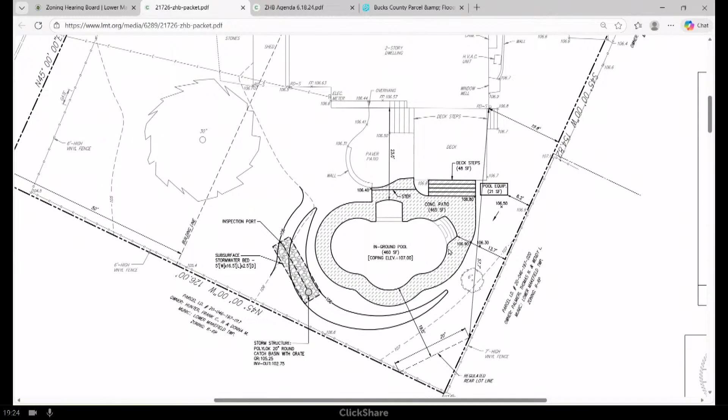Dan, did you take a look at the specs for the mitigation? Yes, that's correct, everything Mr. Lisanti said is accurate in terms of the percentages and the size of the subsurface stormwater bed. So it takes it back to an effective of 13%? Correct. Okay.

Any additional questions from the board? Is there any public comment in the room? Is there any public comment online? No one online. Thank you.

Would someone like to make a motion? So I will move to approve Appeal Z 25-47 as presented with the effective rate bringing the impervious surface down to 13%, subject to township approval.

Is there a second? Second. Discussion? All those in favor? Aye. Aye.

Congratulations. Good luck with your project. Thank you. Thank you very much.

At this time, Appeal Z-26-1, 490 Liberty Drive, please come forward. Or are they online? Online. Oh, there we go.

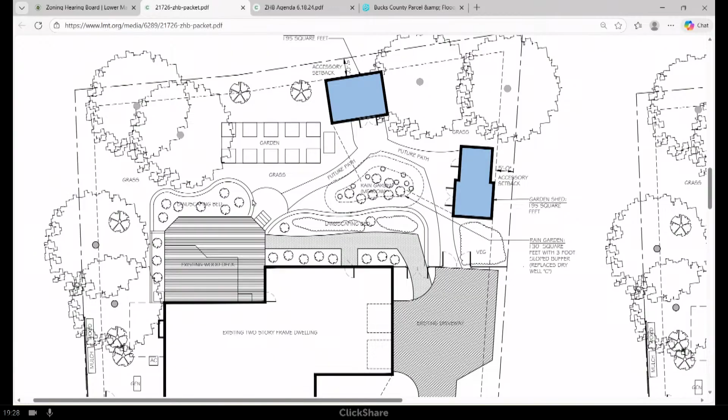Okay, I'm looking at these plans, and when I was home preparing, what am I missing? They appear to be the same.

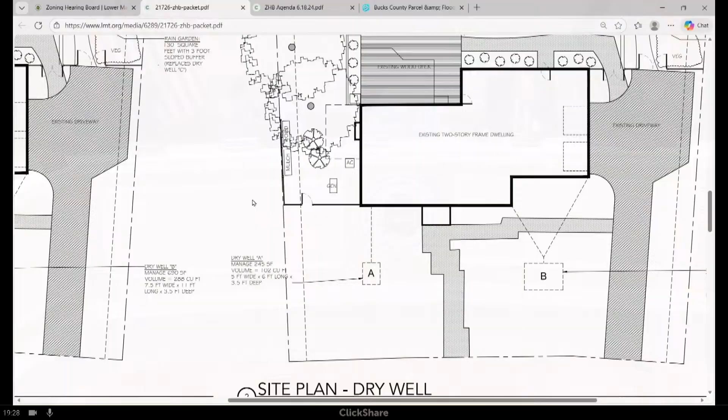So the one on the left has the option for the rain garden for stormwater, and I believe the one on the right is for 3 dry wells. Is that correct? So the one on the left, you're correct, has 2 dry wells and a rain garden, and the other has 3 dry wells, essentially.

Thank you. All right, yeah, board. I just don't believe the client has decided which direction she wants to head, but again, both should be sufficient.

So were any specs provided for the dry wells so our engineer could review? Yeah, so there were. If the board were inclined to approve it, I would just say subject to approval by the township engineer, because honestly, the combination of the dry well and the rain garden, I wasn't really sure how to calculate it. Okay, but either way, Jim or Kyle can look at it if you were to approve it.

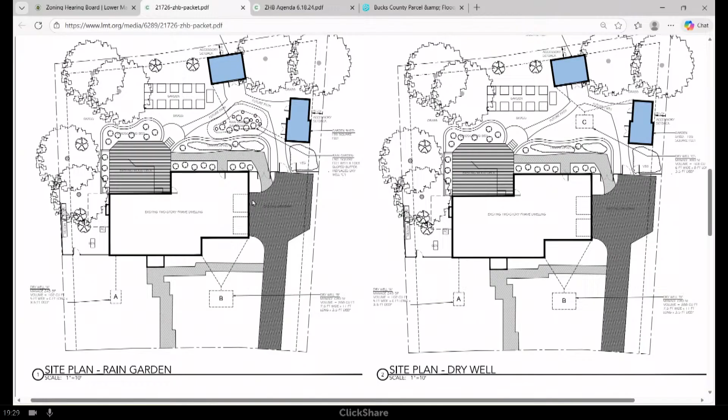In terms of topography, how does the water flow towards the rain garden and the 3 dry wells? Can you give us an idea? Right now our backyard is pretty flat. I imagine, after all this is said and done, if she goes the rain garden route, she's going to have it graded in such a way to accommodate that.

And then you could see on the plan for the 2 dry wells in the front yard, there's little dotted lines showing which downspouts will be draining into each of those 2 dry wells in the front yard. Okay, thank you. Yep.

Anybody else? Yeah, real quick, the future path between the buildings and the rear deck, is that included in the impervious surface calculation? No, that's not included in the impervious, and we've honestly kind of steered her toward making that like mulch, since we're already over our impervious as I mentioned. So to get her back to 18%, we're trying to steer away from doing anything additional on top of that. Nothing is currently included in the scope or the impervious calculations.

Is that something we can specifically put in to say there's no future paths to be installed? Yeah, I think you could make that a condition. I also think it'd be recommended because if this were approved, they would need an additional variance if the future path was something impervious. They would have to come back and go through the permit process again, the application fee, that sort of thing. So maybe trying to save her $500 down the road.

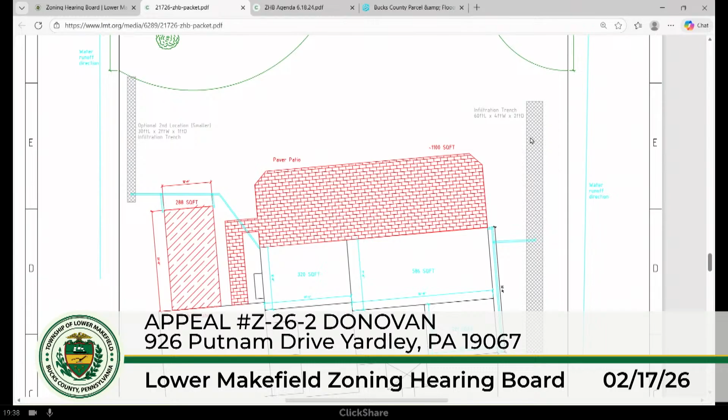So are you planning on doing 1 or 2 infiltration trenches? It looks like one says optional. Yeah, as of right now, I was just planning on doing the one. The way it works right now, there is a roof leader off the back that pools near the garage, so I'm at least going to direct that away. And if there's something small that I put back there, just as a catch, then I might end up doing that. But as the plan stands, it's just going to be that one large infiltration trench. So this is a pretty significant patio.

Generally, I don't like to tell people how they should and shouldn't use their house, but you're seeking to go up to 25.6% with what appears to be an 1,100 square foot patio. Is there any possibility of reducing that?

So initially it was a little bit bigger, the shape was a little bit different. I am open to it, but as of right now, this was the... I mean, maybe the shed. Like, what would be more preferable sitting in your seat? Because the shed looks pretty large as well.

Preferably, if I were to do something, I mean it was bigger initially in the plans that we had. If I were to do something at all, it would be cutting from the side near the infiltration trench and adding landscaping on that side, as opposed to going full to the edge of the house. You talking about the patio? Yeah, the patio going to the edge of the house in the back.

So this is all an open patio, no covering on it of any kind? Correct, and it's 56 feet wide. Yes. And when you talked about perhaps lessening either the width or the depth, I think you addressed the width. Can you elaborate a little bit on what you said, what you would do and how much you would do? The how much is unclear at the moment, but it's carving out a little bit from that side on the right side of the house if you're looking at the plan, and then putting potentially landscaping there to surround the patio to catch a little bit of additional water runoff.

Yes, the trench would be there, and I assume if there were any changes, it would be sized appropriately. And is the 56 feet designed to accommodate any specific doors or openings in the house? No, it's not. It's just the full span of the back of the house.

I see you also have an arrow that the water runs off towards Putnam Drive. So is your house kind of on a crown? It is. A sump pump doesn't run very often, but it pops when it does. Back in the summer of '23 there was a bad rain. The sump pump comes out on the right side of the house as well and feeds into the same system - it's not really a leader, but it runs horizontally on the ground underneath the side of the house and spits out maybe 10 feet or so. So if there was a very bad rain, it would be collected in the same infiltration trench, and the sump pump would pump out into the infiltration trench as well.

What side of the family room is the slider - is it more towards the breakfast area, or more back towards the fireplace? It's more towards the breakfast kitchen area. Yeah, so maybe push it over, and instead of 28, maybe 32 by 18, and kind of center it in the middle of the house.

I don't want to design it. I know, that's what, sometimes we run into that problem, where people come in front of us and we start designing stuff. Would it be better to come up with, hey, here's what I came forth with square footage-wise, and let's get it back to this, and you figure out how - square footage is what we would have to put into our decision.

So that would be the metric that we would use, and then in terms of how you design it would be okay, right? Right, because you don't have any other issues like setback and stuff. At that point, we'd be doing square footage and let you design it - that would be just for the patio and the walkway. So how much of this is up to interpretation?

Mine, depending on who you ask, right? I'm just curious - depending on who you ask, this could be a lot of patio, or this could be not a lot of patio. There's instances where you've approved more than what I'm asking for, as long as it's mitigated back to 18.

But this is an issue, right? I'm just trying to make it a little bit more black and white for myself. How can we come up with this? For me, the basic answer is, what's the hardship of you needing a 56 by 18 patio?

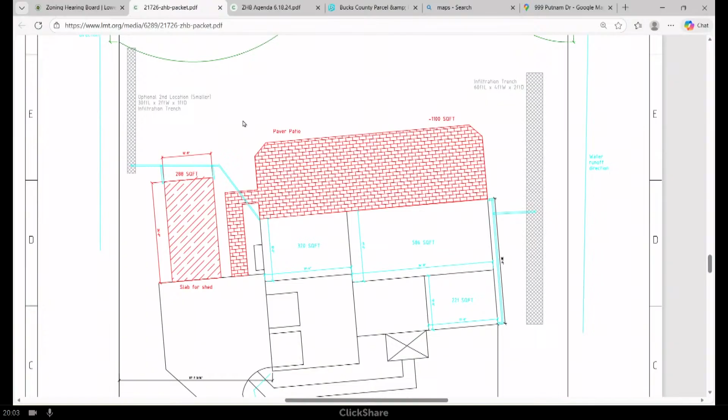And I want to be clear, too - again, I don't want you to think, oh my God, I got to put a third infiltration trench in. You're going to be able to make that infiltration trench on the right side of the house - it's going to be able to be smaller most likely, okay?

Because now, if you have the infiltration trench in front, I'm thinking you have electric, FiOS, and I'm assuming you have public water and public sewer that run right next to each other, correct? Right, yeah, and I'm assuming they come in maybe right behind the garage? That's usually where they do it - actually, in the street photo that Dan had shown earlier, you could see markings in the street, blue and green for the water and the sewer.

Yeah, I mean, it pops up right there. You can, there's markups there. That was the green one just to the right of the mailbox, and there's a blue one a little farther down.

So, sewer and water - to Christian's point, the utility companies will come out and mark it off for you, including FiOS, PECO, and I guess Aqua and Pennsylvania American Water probably. How often are they marking this stuff off for our neighbors, Dan? I don't know, I know that the PA One Call will do it. A lot of the utilities - I can't speak for the private sector utility companies though.

When I called, they came out because I had the front yard marked. I saw electric and Verizon at the time. There wasn't Comcast - that's the only people that came out that I saw.

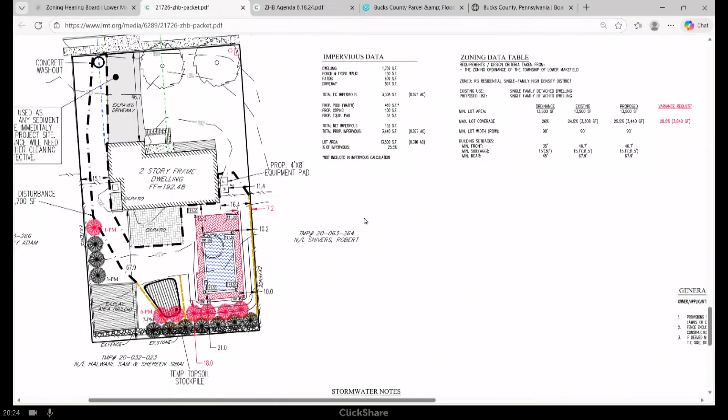All right, board questions? I'm curious as to why you didn't do everything at one time when you went for the pool permit. Why didn't you do this at the same time? I think the idea was we could start putting the pool in, but then we had the coldest winter of all time. They could dig the pool, and then we would come in here and do this in the winter. It just so happened that they haven't started any of the work at this point. So here we are, getting it all done at once now. Okay.

So the pool is already dug out then? No, it hasn't been yet, it's just been permitted. How's the water situation back there? I know people on that street and it gets a little marshy. We have a French drain along our privacy fence that helps, and our neighbor Sam has done irrigation too, so our yard is actually much drier than most in the neighborhood. When we first moved in it wasn't, but now there's no trees back there, so the sun hits it differently and keeps it dry. You guys are slab, no basement, right? Correct.

Any additional questions? Any public comment online? Rob, you're the only one in the room. All right, would someone like to make a motion?